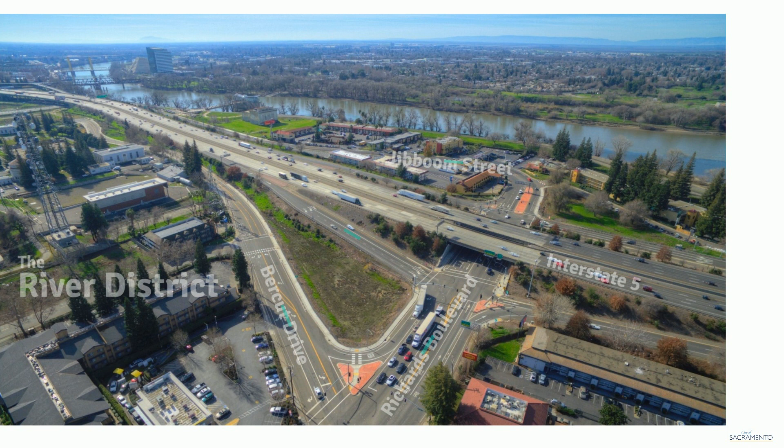The interchange was last studied by the City of Sacramento in 2010, which resulted in the widening of Richards Boulevard, improvements to the interchange off-ramps, and reconstruction of portions of Jibboom Street and Bercut Drive. These improvements provided interim traffic relief, but were never intended to accommodate the future development of the River District and rail yards. The city is now preparing an environmental document to further study the interchange and identify a preferred long-term solution for current and future congestion.

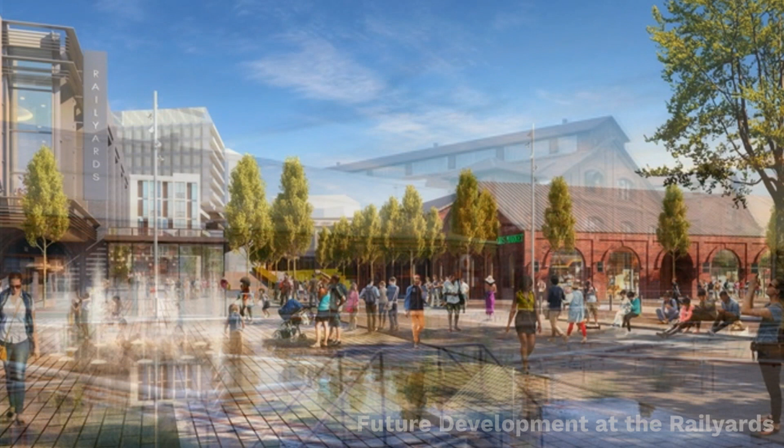The rail yards, home to the future Kaiser Permanente Medical Center and Sacramento Republic Sports Stadium, will bring in new development and an increase in the number of people who travel by car, bike, or walk to the area. The River District redevelopment, including the state's Richards Boulevard office complex, combined with the rail yards, will add numerous residents and businesses, resulting in a substantial increase in traffic to the area.

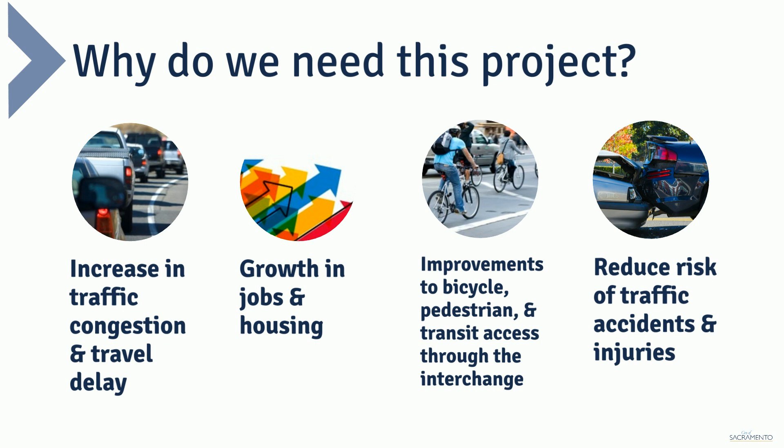The project team has been forecasting and analyzing how much traffic will be moving through the interchange area over the next 20 years, considering these future developments. Improvements are needed to address the anticipated growth in jobs and housing and the expected increase in traffic congestion and delay. Bicycle and pedestrian access through the interchange area needs to be more connected, with improvements that reduce the risk of collisions and injuries for bicyclists, pedestrians, and motorists.

With anticipated development, jobs and housing units are projected to grow exponentially in the area. This will increase traffic and congestion for motorists and require improved connections for bicyclists and pedestrians. More than 25,000 additional housing units and jobs are expected in the rail yards, River District, and Central City planning areas by 2047.

The purpose of this project is to provide long-term operational and circulation improvements to address existing congestion and accommodate future traffic volumes. The interchange will be designed to accommodate a 20-year traffic forecast from the year it is completed.

Looking forward into 2047, this graphic illustrates travel times in and around the interchange if no improvements are made. In the afternoon commute hour, average travel time is projected to increase to more than 18 minutes in just the interchange area.

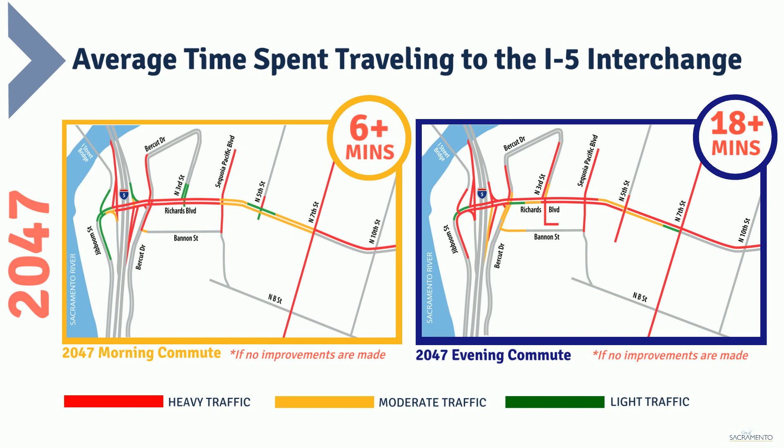In the spring of 2019, the city began reaching out to adjacent property owners and key stakeholders to discuss their current transportation needs and issues in the project area. After evaluating all of their input, the project team developed 4 alternatives that address the project objectives.

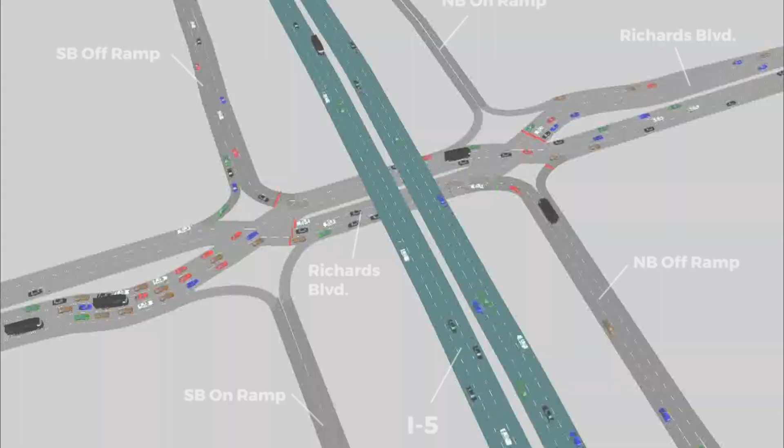3 of the 4 alternatives are variations on a type of interchange referred to as a Diverging Diamond Interchange. The Diverging Diamond Interchange, or DDI, is an alternative to conventional interchange forms. The primary difference between a DDI and a conventional diamond interchange is the design of directional crossovers between signals. This eliminates the need for left-turning vehicles to cross the paths of approaching through vehicles.

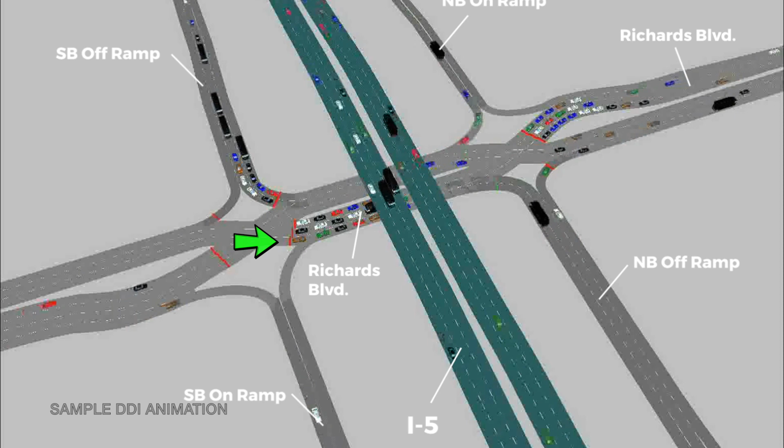By shifting Richards Boulevard traffic to the left side of the street between the signalized crossover intersections, vehicles on Richards Boulevard making a left turn onto or off of I-5 ramps do not conflict with vehicles approaching from other directions. The traffic flow for a DDI at Richards Boulevard is illustrated in this video. Additional videos of actual diverging diamond interchanges and how they operate are available on the project's website.

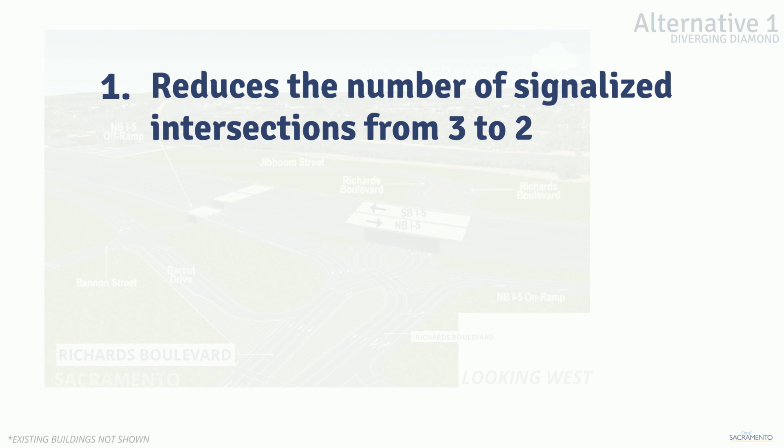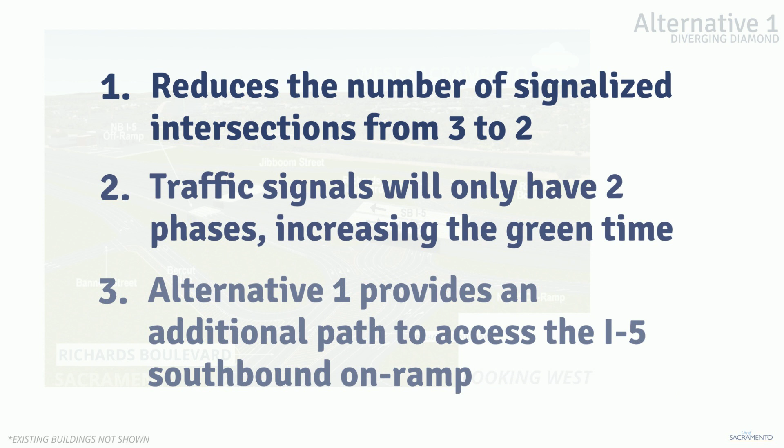Alternative 1 is a diverging diamond interchange. It includes 3 important changes from the existing interchange that improve traffic operations. First, this alternative reduces the number of signalized intersections from 3 to 2. Second, the traffic signals will have only 2 phases, increasing the green time. And third, this alternative provides an additional path to access the I-5 southbound on-ramp.

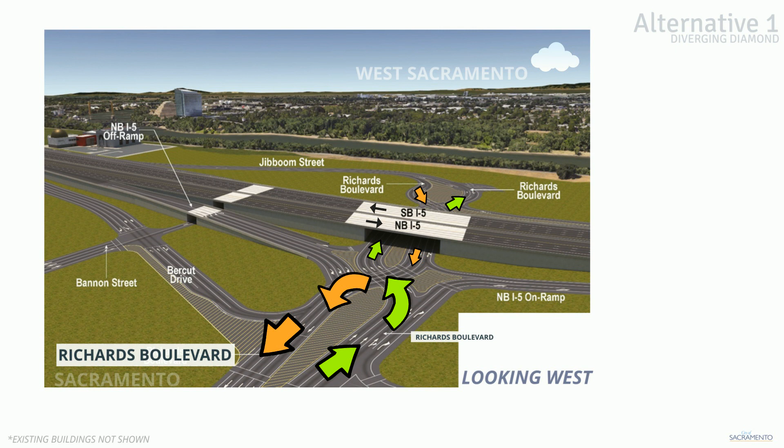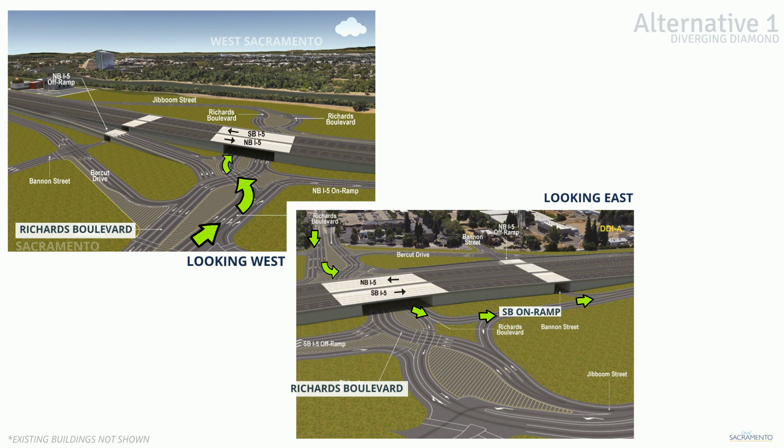Fundamental to the DDI concept is that traffic crosses over to the opposite side of the street between the intersections at the freeway ramps. For example, vehicles heading westbound on Richards Boulevard to access the I-5 southbound on-ramp would cross to the left, or south side, of Richards Boulevard, continuing through the underpass, and make a left turn onto the I-5 southbound on-ramp. Similarly, traffic heading eastbound from Jibboom Street to access the I-5 northbound ramp would cross over to the left, or north, side of Richards Boulevard, continue through the underpass, and make a left turn onto the I-5 northbound on-ramp.

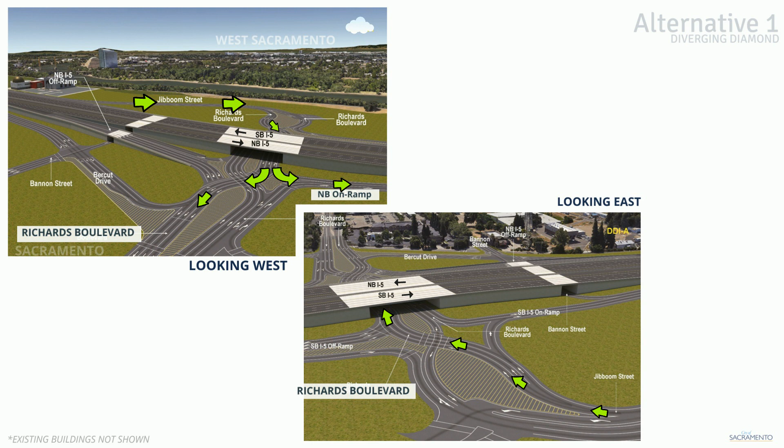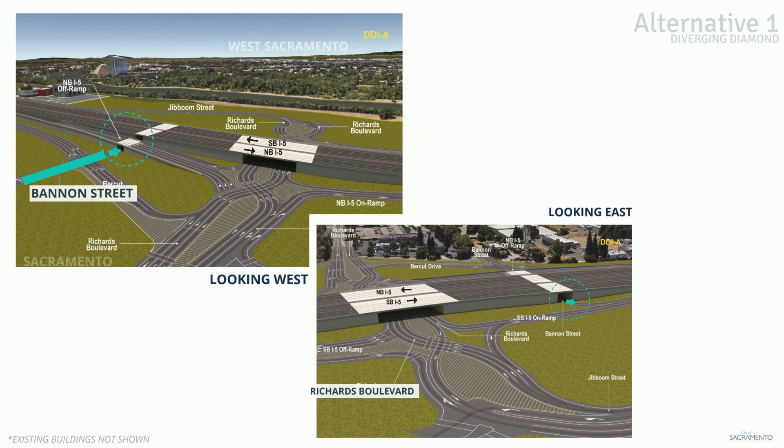In addition to the DDI configuration, Alternative 1 includes an extension of Bannon Street from its current intersection with Bercut Drive, under the I-5 northbound off-ramp, through a new underpass of I-5, ultimately merging with the I-5 southbound on-ramp. This allows traffic to access southbound I-5 from Bannon Street and avoid having to travel on Richards Boulevard.

Alternative 1A is identical to Alternative 1 with one exception. The Bannon Street extension continues through a new underpass of I-5, but rather than merging with the I-5 southbound on-ramp, continues under that ramp and forms a new signalized intersection at Jibboom Street.

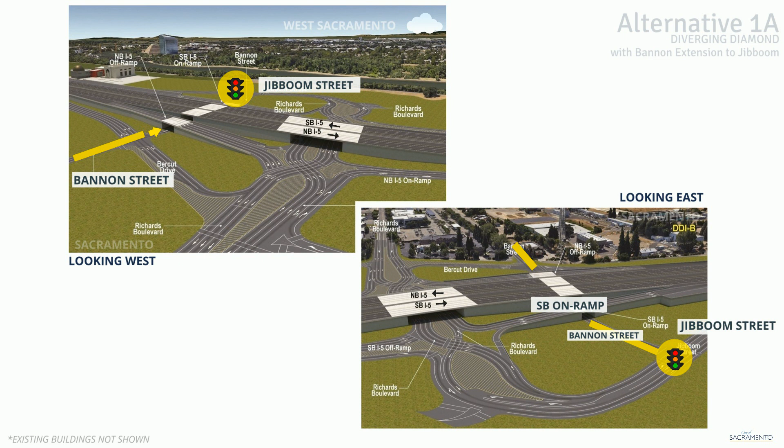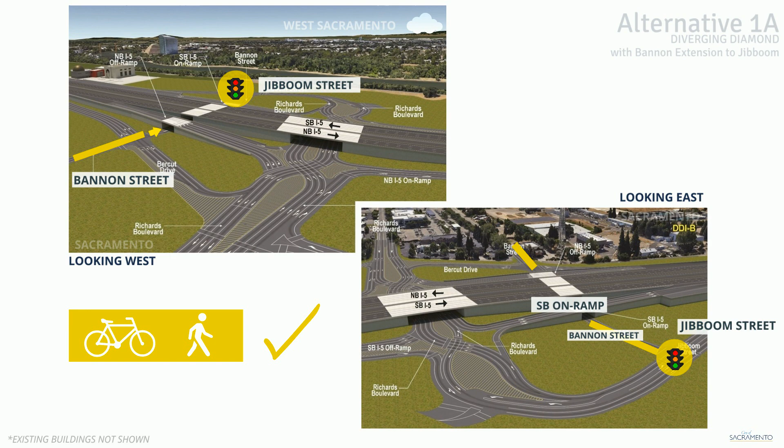Traffic on the Bannon Street extension is two-way traffic. This allows westbound vehicles on Bannon Street to avoid using westbound Richards Boulevard while still accessing both the I-5 southbound and northbound ramps from Jibboom Street. Bicycles and pedestrians can use the Bannon Street extension to travel through the interchange to Jibboom Street without having to cross the on-ramps and off-ramps along Richards Boulevard.

Alternative 2 is the only alternative that is not a DDI. Alternative 2 includes a new I-5 northbound on-ramp that begins on Bercut Drive at the intersection with Summit Tunnel Avenue at the northwest corner of the rail yards. The new northbound on-ramp merges with I-5 prior to Richards Boulevard.

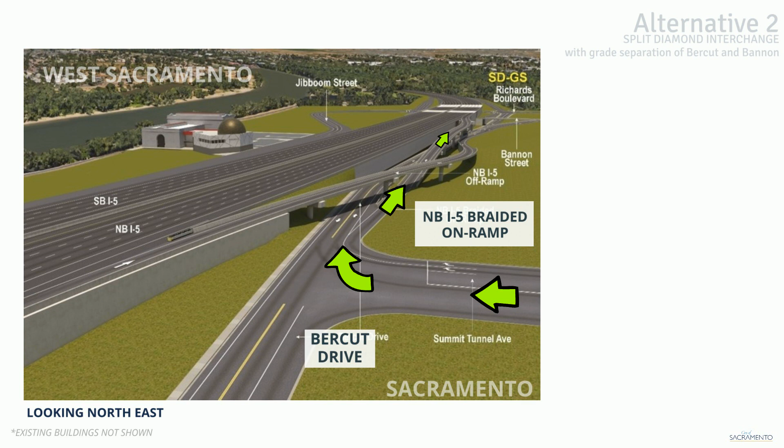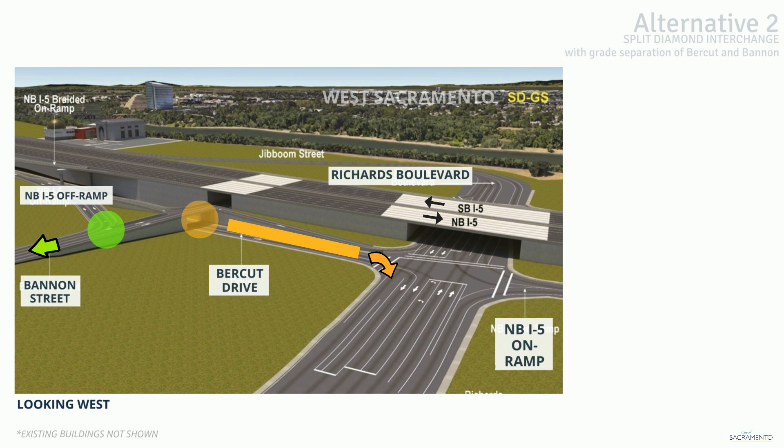The I-5 northbound off-ramp is realigned to exit I-5 and merge directly into eastbound Bannon Street. Bercut Drive is grade separated beneath the Bannon Street extension and intersects with Richards Boulevard. The Bannon Street extension is similar to Alternative 1, forming a new underpass of I-5 and merging onto the I-5 southbound on-ramp.

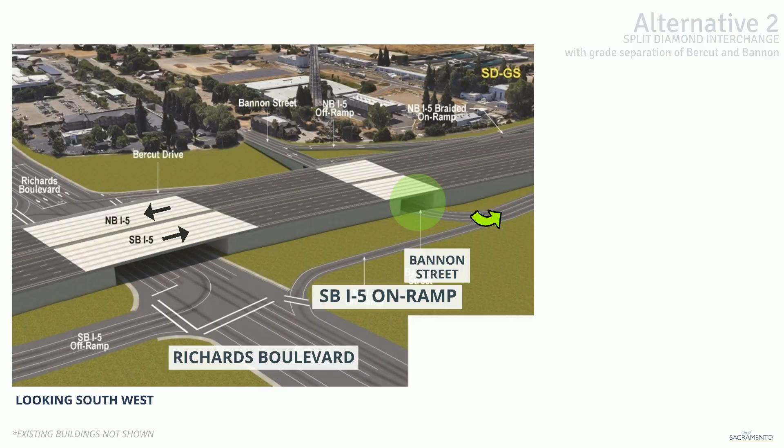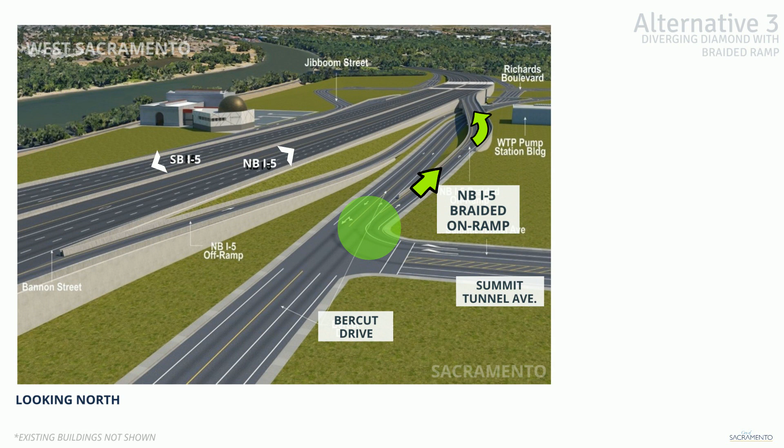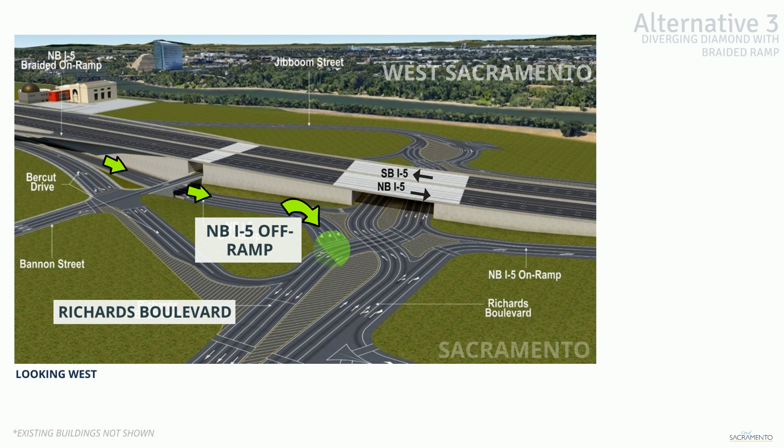Alternative 3 is a DDI that combines Alternative 1 with a new I-5 northbound on-ramp similar to Alternative 2. The new I-5 northbound on-ramp begins on Bercut Drive at the intersection with Summit Tunnel Avenue and merges with I-5 prior to Richards Boulevard. The I-5 northbound off-ramp is realigned to grade separate beneath the Bannon Street extension and continues to an intersection at Richards Boulevard. The at-grade intersection of Bercut Drive and Bannon Street is signalized.

Bicycle travel through the existing interchange is suitable for only the most experienced bicycle rider. Improvements to the interchange, and/or alternative bicycle routes, are needed to provide bicycle riders a safe, comfortable, and continuous path through or around the interchange.

The median that separates the two directions of traffic between the crossovers provides a center walkway for pedestrians, as well as for bicyclists who don't wish to ride with traffic. The reduced number of signal phases for DDI traffic signals allows more green time, making it easier for pedestrians to cross. Also, pedestrians' crossing distances are shortened to only cross one direction of traffic at a time.

The reduced crossing distances can also benefit bicyclists by reducing exposure time within the intersection and minimizing the chance for vehicular conflicts. The DDI alternatives include bicycle lanes through the crossovers, providing dedicated right-of-way for bicyclists.

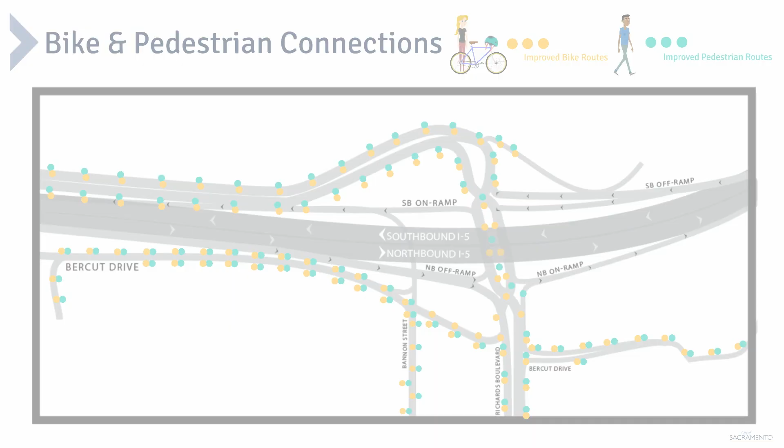All alternatives include a new bicycle and pedestrian path from Bercut Drive to the Two Rivers Trail. This allows bicycles and pedestrians to travel under I-5 and access Jibboom Street and the Sacramento River bike path without having to travel on Richards Boulevard through the interchange.

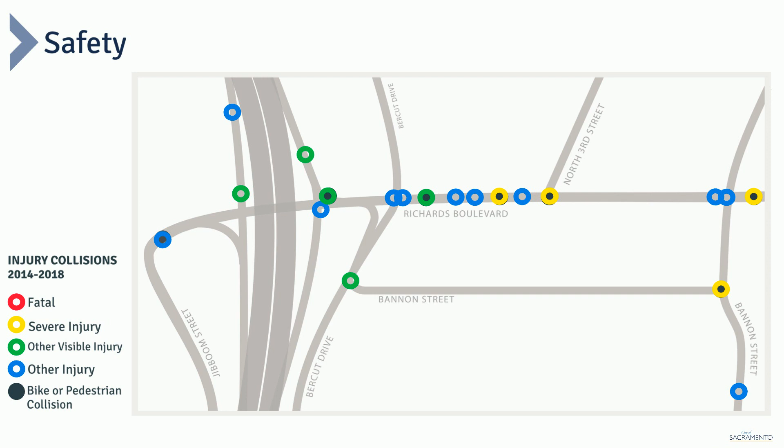One of the objectives of the project is to improve safety for all modes of travel, including bicycling and walking, in the interchange area. As shown on this graphic, during the 5-year period from 2014 to 2018, a number of injury collisions involving motorists, bicycles, or pedestrians occurred on local streets in the project area. The project alternatives are designed to reduce the risk of collision on these roadways, consistent with the city's Vision Zero goal to eliminate traffic fatalities and serious injuries by 2027.

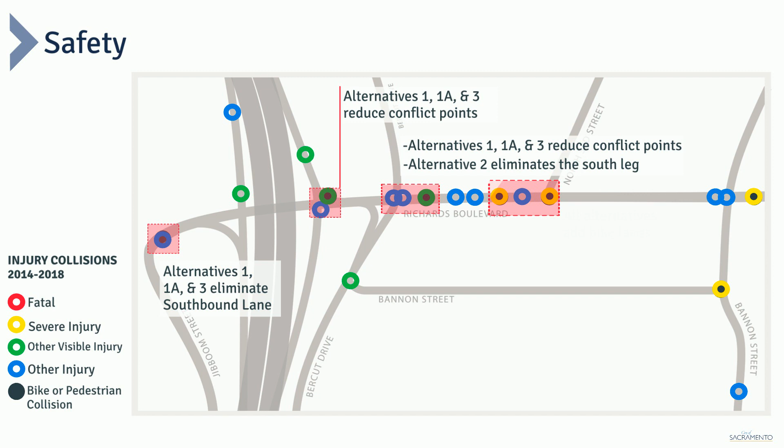The DDI design has shown to significantly reduce the number of vehicle-to-vehicle conflict points compared to a conventional diamond interchange. The DDI also reduces the severity of conflicts, as conflicts between left-turning movements and the opposing through movement are eliminated.

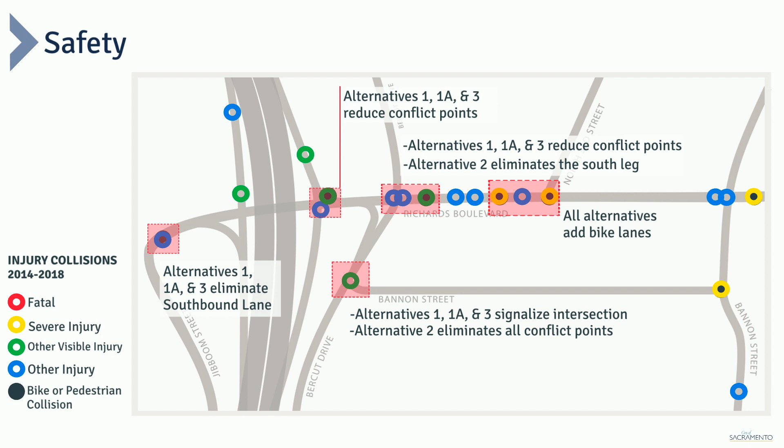All 4 alternatives have been qualitatively compared, but the selection of a preferred project alternative is pending the outcome of the environmental process. Conceptual level cost estimates for the alternatives considered range from $46 million to $100 million. The project is currently funded through the design of the interchange with Regional Surface Transportation and Measure A funding, and will require compliance with both the National Environmental Policy Act, or NEPA, and the California Environmental Quality Act, or CEQA.

Alternative 1 has the lowest cost and highest benefit to cost ratio, and is second best at reducing congestion and travel delay. Alternative 3 has the second highest benefit to cost ratio and performed the best at reducing congestion, travel delay, and queuing.

Both alternatives 1 and 3 were relatively better in terms of safety than the other 2 alternatives. Alternatives 1 and 3 will be carried forward for additional preliminary engineering and environmental evaluation.